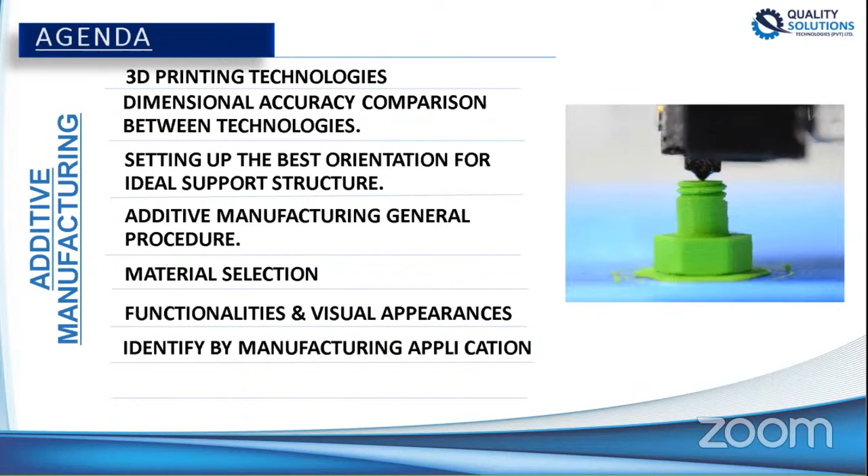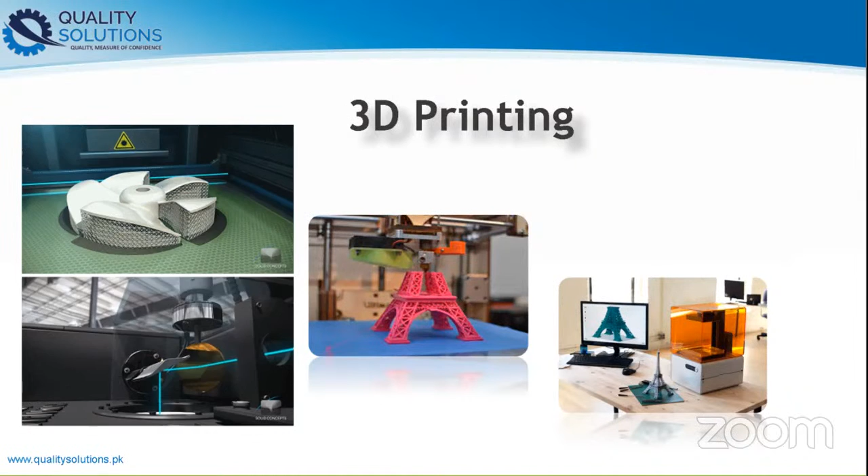3D printing is a process of creating solid objects from a digital file. The creation of a 3D printed object is achieved using an additive process, where successive layers of material are laid down in different shapes. The object can be of almost any shape or geometry and is produced from a 3D model or other electronic data information.

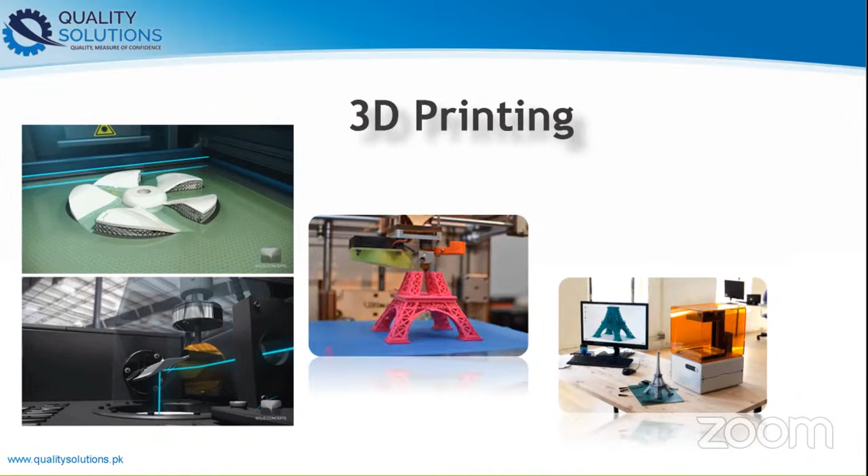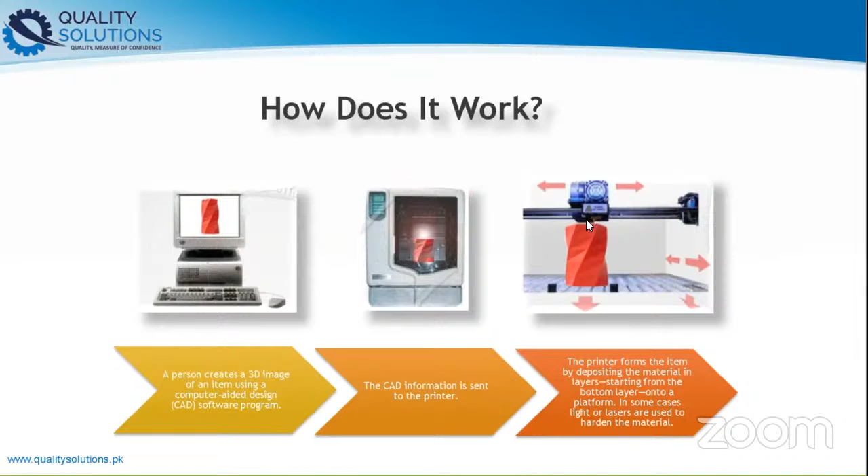When a person creates a 3D image or a CAD data model of an item in a software program like SolidWorks, they then send the CAD information to the 3D printer, where the printer forms the item by depositing material in layers starting from the bottom onto the platform. In some cases, light or lasers are used to harden the material.

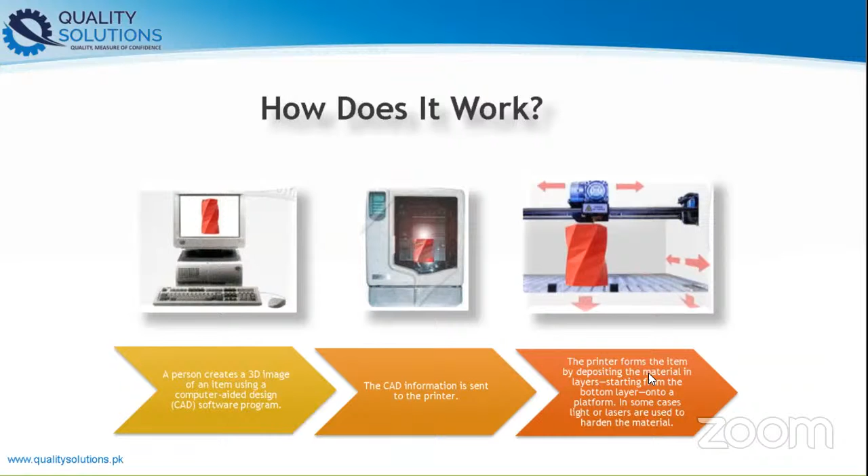Additive manufacturing takes virtual blueprints from computer aided design, that is CAD, and first slices them into digital cross sections for the machine to use as a guideline for printing. After the machine reads the design, it lays down successive layers of liquid, powder, or sheet material to build the model from a series of cross sections. These layers, which correspond to the virtual cross sections from the CAD model, are joined together or automatically fused to create the final shape. However, the strength, finishing, and accuracy of the 3D printed part depends upon some important aspects that we will discuss today. This is how we get the final model from CAD.

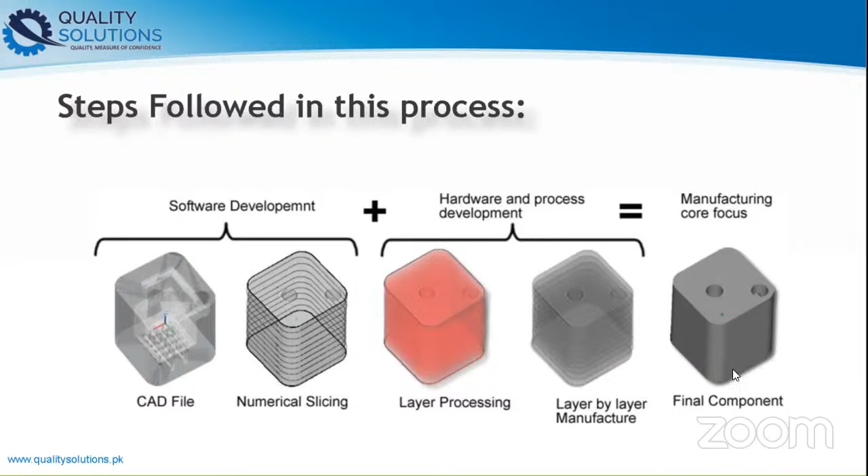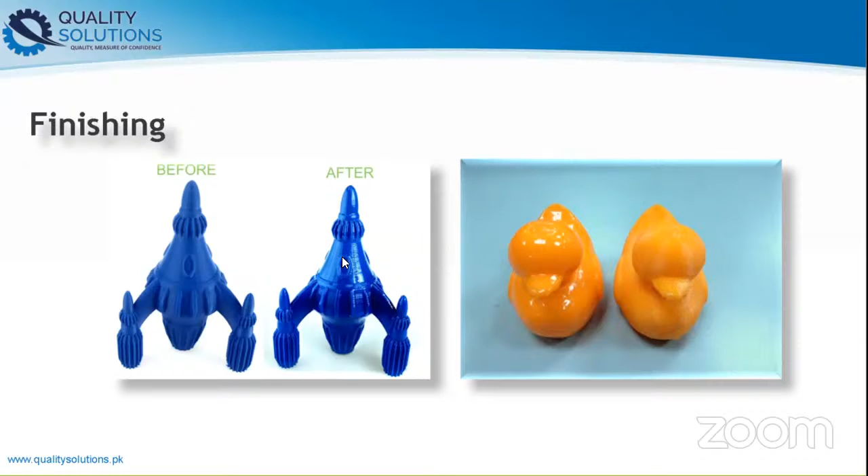Even though the printer produced resolution is sufficient for many applications, printing a slightly oversized version of the desired object in standard resolution and then removing the material with a higher resolution, that is a subtractive process, can achieve a higher resolution with good quality. So what you're seeing on your screen showing both results, the rough printing process and the surface finish after subtracting the rough material from that.

So right now, methods and technology of computer aided manufacturing are fused filament fabrication, that is FFF, also known as fused deposition modeling, we call it FDM, builds objects from the bottom by layering plastic that's heated in a moving extrusion head. SLA, also known as stereolithography apparatus, is optical fabrication or photo solidification or resin printing. This form of 3D printing technology is used for creating models, prototypes, patterns, and production parts in a layer by layer fashion using photochemical processes by which light causes curing.

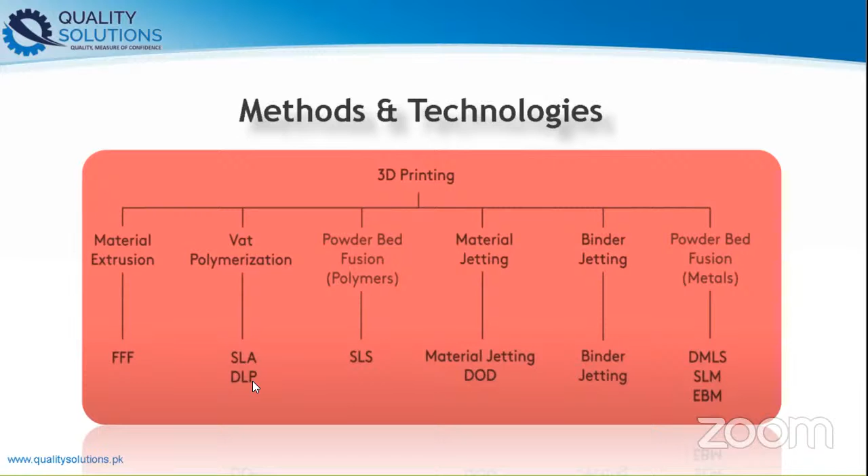In order to help quantify the accuracy of 3D printed parts, the parameter of accuracy variables like dimensional accuracy of calibrated machine, warping or shrinkage factors, and support requirements have to be tested.

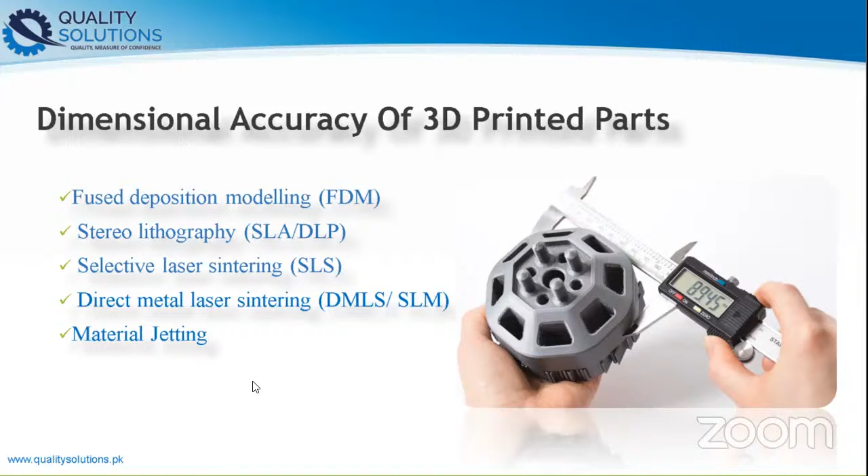Let's start with the FDM, the fused deposition modeling, which is best suited for low cost prototyping where form and fit are more important than function. FDM produces parts one layer at a time by extruding a thermoplastic onto a build plate. For large parts, this can lead to big variations in temperature across the build platform. As different areas of the part cool at different rates, internal stress causes the print to deform, leading to warping or shrinkage. Solutions like printing rafts, heated beds, and radii at sharp edges and corners can help reduce this.

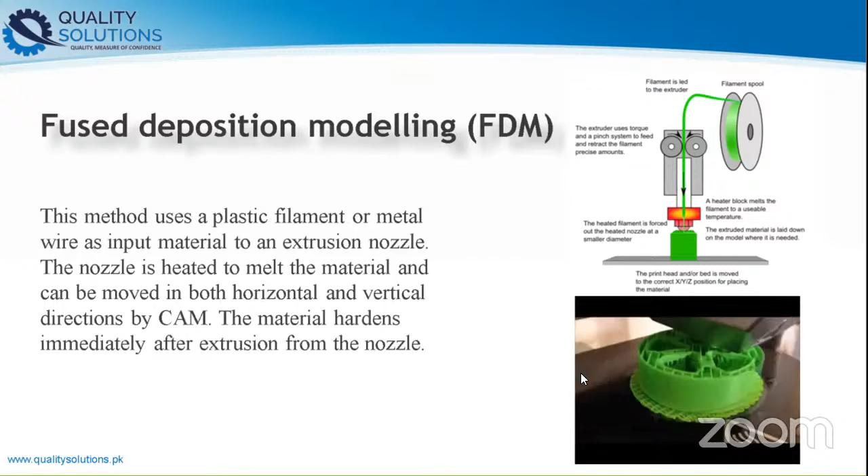Different materials are more prone to warping than others. For example, ABS is known to be more susceptible to warping than PLA. As we look at this chart, for both desktop and industrial 3D printers, thermoplastics require a higher printer temperature, which is more risky.

It's better to add a radius on the bottom edge of the part in contact with the build plate, which is recommended. However, shrinkage usually occurs in the 0.2 to 1% range depending on material.

Regarding the support required, it's essential to achieve an accurate part greater than 45 degrees, and the dimensional tolerances between 3D printers are of two types: desktop versions and industrial. The desktop tolerances are 0.5%, that is 0.5 mm, and for the industrial that is 0.15%, that is 0.2 mm for the industrial.

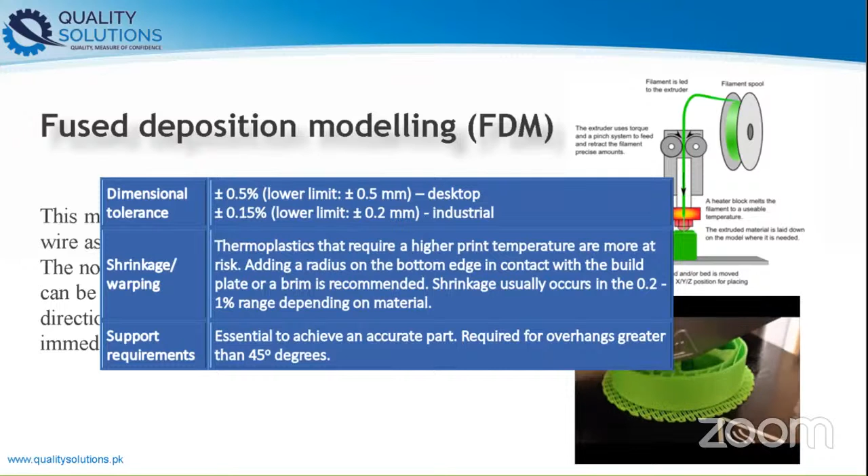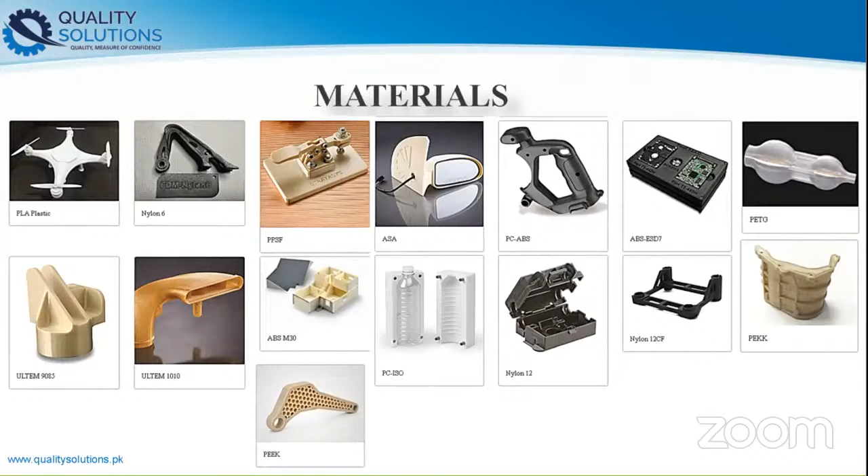So right now in FDM there are a lot of materials in which you can print. You can print in PLA plastics, nylon, PEEK, ABS, ASA, and there are categories in ABS and nylons as well, like nylon 6, nylon 12, nylon 12 CF. So there are a variety of materials available for the FDM technology.

The SLA printers use a laser to UV cure specific areas of a resin tank to form a solid part, one cross section at a time. These cured areas, however, are not at full strength until post processing with UV. Because of this, and the angle and orientations that SLA parts are typically printed at, sagging of unsupported spans can occur. As one layer is built up at a time, this effect becomes cumulative, leading to the dimensional discrepancies sometimes seen in tall SLA parts.

Dimensional discrepancies can also occur because of the peeling process used by some SLA printers. The pulling force during peeling can cause the soft print to bend, which again can accumulate as each layer is built up. Resins that have lower flexural properties, meaning they are less stiff, are at a greater risk of warping and may not be suitable for higher accuracy applications.

When we took a chart and look here again, for both desktop and industrial printers, the dimensional tolerances are 0.5 and 0.15%, but its lower limits are 0.10 mm for the desktop printers, and for the industrial application it is 0.01 mm. Shrinkage is likely for unsupported spans, where support is essential to achieve an accurate part.

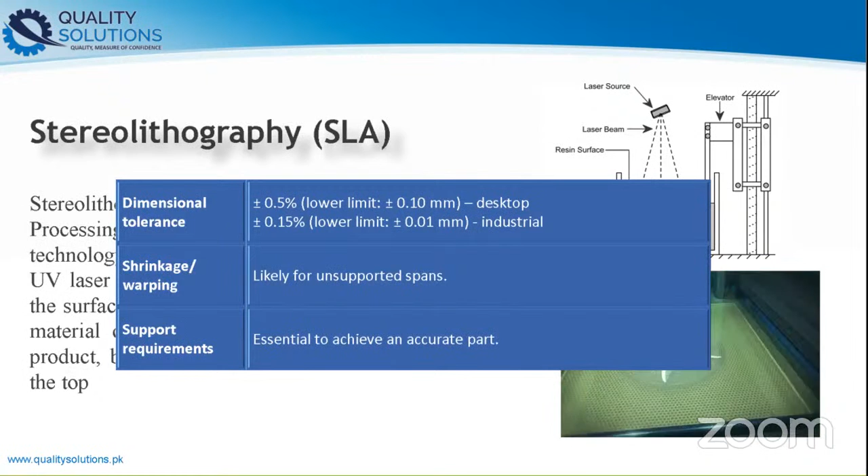Again, like FDM 3D printer technology, the SLA technology is also fully equipped with a lot of materials, and there are more than 10 to 13 resin types in which you can print.

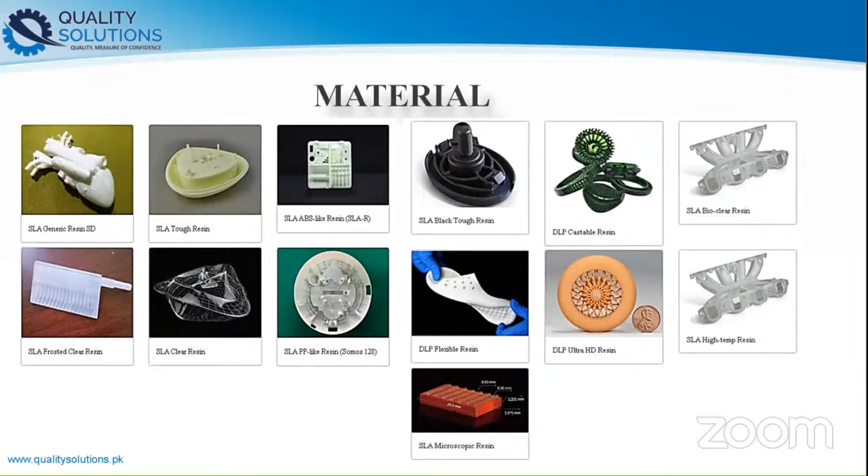Now come to the selective laser sintering process, that is SLS printing. The SLS produces parts with high accuracy and can print designs with complex geometry. A laser selectively sinters powder one layer at a time to form a solid part.

To restrict the likelihood of part warping or shrinking during printing, SLS printers use heated build chambers that heat up the powder to just below the sintering temperature. This does still, however, result in temperature gradients in large SLS parts, where the bottom of the part has cooled while the recently printed top layers remain at an elevated temperature.

To further mitigate the likelihood of warping occurring, parts are left in the powder to cool slowly, often for 50% of the total build time.

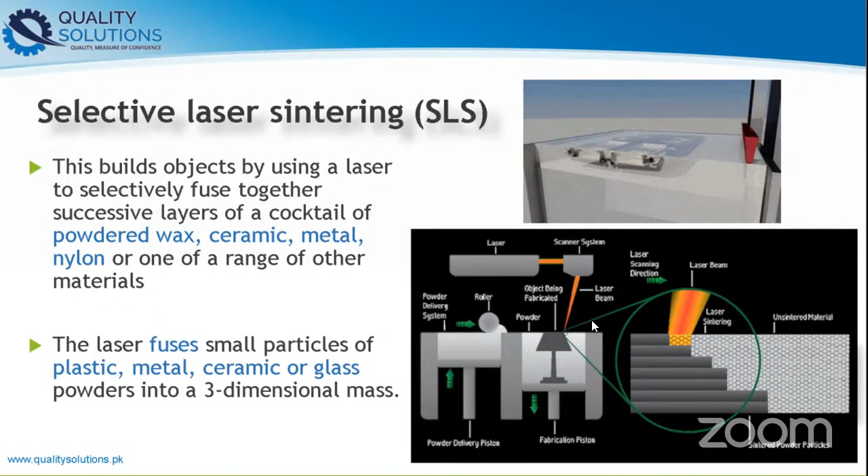The dimensional tolerance of the SLS for industrial printers generally gives you a lower limit of 0.3 mm.

Shrinkage usually occurs in the 2 to 3% range, and there will be no support required during the 3D printing, as the laser directly hardens the part and the rest of the part remains the same, so that the remaining powder creates a role as a supporting material. So there is no need for the SLS 3D printing technology to use a support material.

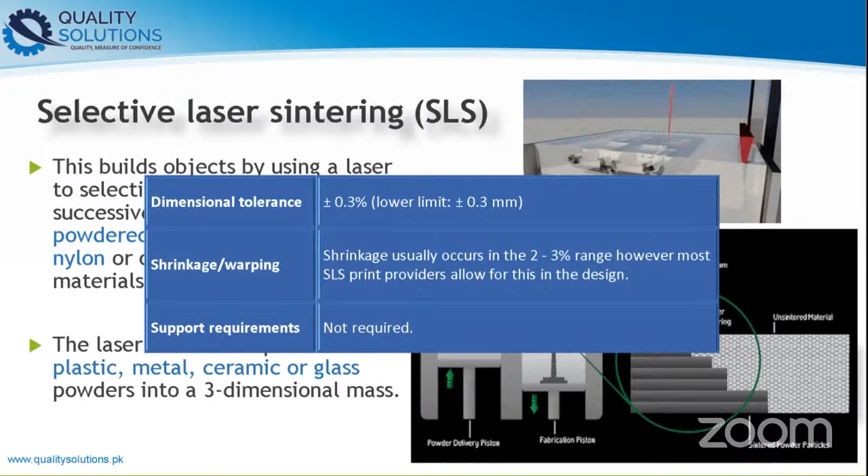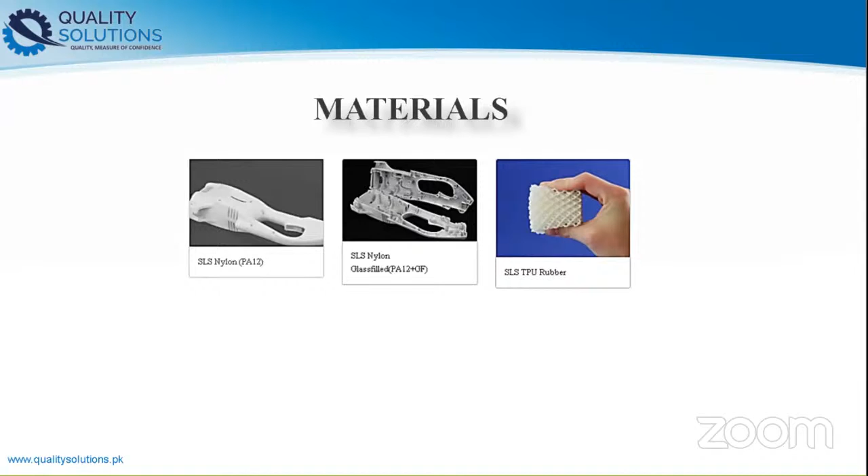Now let's come to metal printing, specifically DMLS and SLM. DMLS is the direct metal laser sintering method. It uses a laser to selectively sinter or melt powder to produce metal parts.

Much like SLS, metal printing produces parts one layer at a time in a controlled and heated environment on an industrial sized machine. This layer by layer construction, coupled with the very high temperatures involved in the process, creates extreme thermal gradients.

The net effect is that stresses are built into the part. As a result, metal printed parts are at a high risk of distorting or warping, meaning good design practices and part orientation are critical to achieve an accurate part.

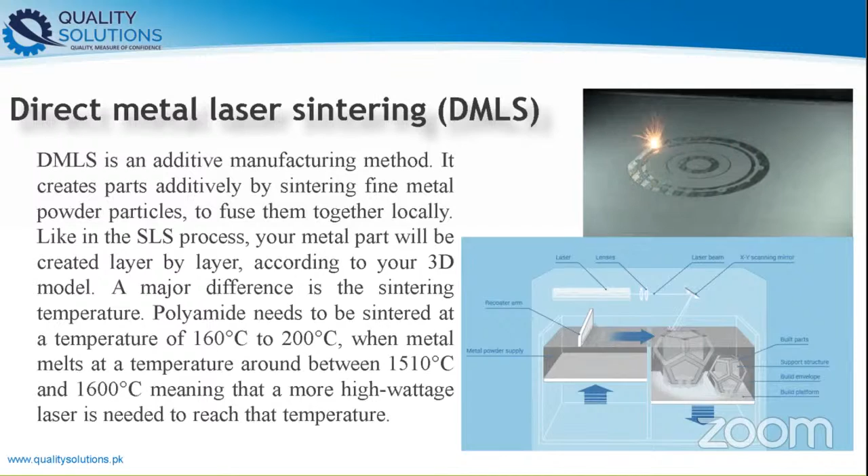The dimensional tolerance is 0.1 mm in the metal 3D printing case, with parts at a high risk of shrinkage or warping. Bracing and supports are used to help reduce the likelihood of this occurring, and support is essential to achieve an accurate part.

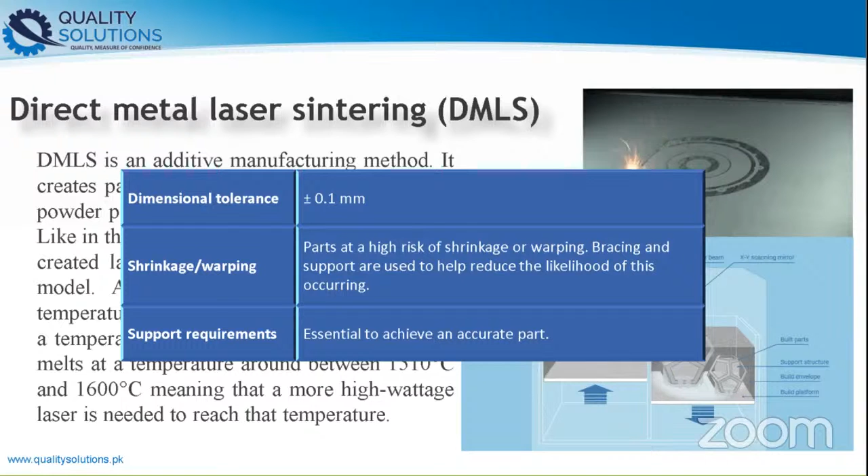Materials you can print for both SLM and DMLS 3D printing are stainless steel, titanium, bronze, cobalt chrome, aluminum, Inconel 625 and 718, and maraging steel. So all of these materials you can print with DMLS and SLM technology.

Right now we are describing the 3D printing technologies, and inshallah in our upcoming webinars we will discuss the differences between technologies like SLA and SLS, DMLS and SLM. But currently we would like to deliver you this information.

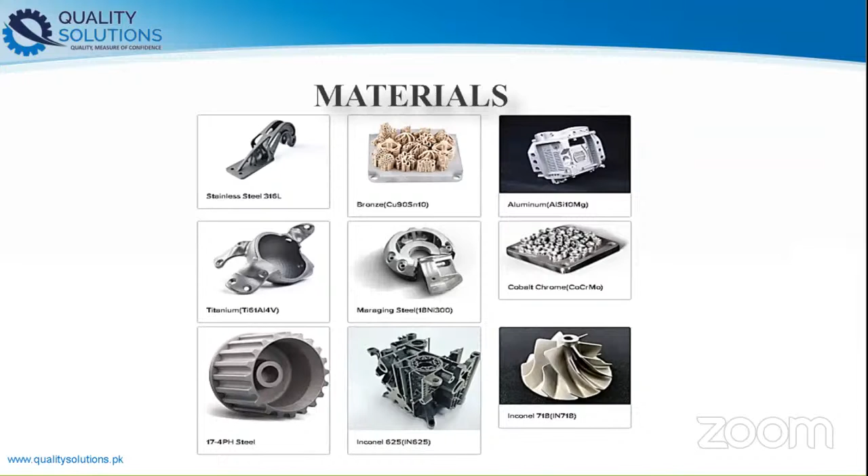Now, selection by correct 3D printing process. 3D printing is an umbrella term that encompasses multiple processes. Every 3D printing process has its benefits and limitations, and each is more suitable for certain applications than others.

We have approached the process selection from three different angles: the required material should already be known, the characteristics of the end part, like physical or visual, should be defined, and certain process capabilities like accuracy, build size, etc. are required.

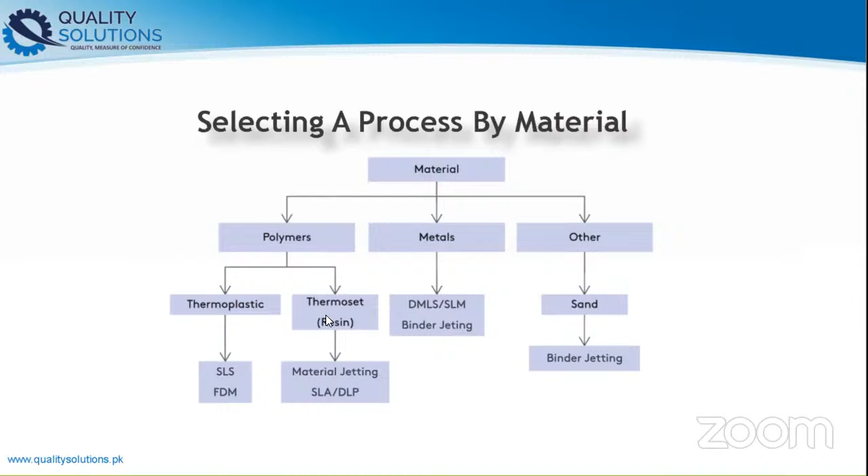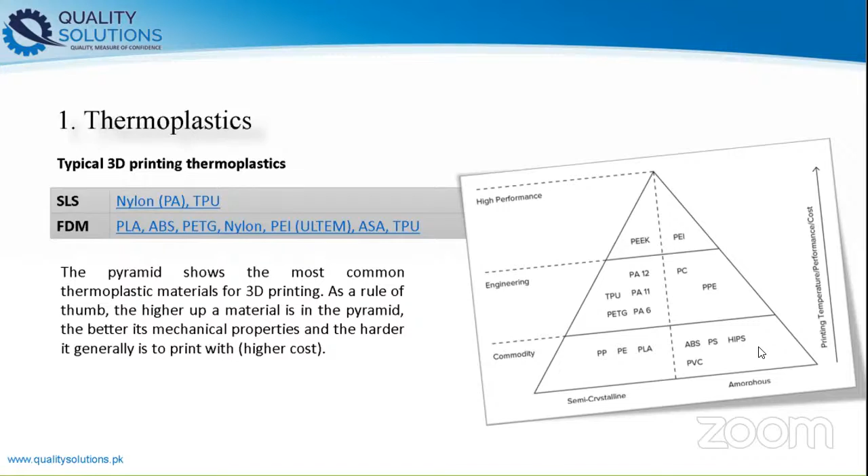The next process should be the thermosets, resins. Resins are better suited for applications where aesthetics are important, as they can produce parts with injection-molded like surfaces and fine details. Generally, they have high stiffness but are more brittle than thermoplastics, so they are not suitable for functional applications. Specialty resins are available that are designed for engineering applications mimicking the properties of ABS and PP, or for dental inserts and implants. Material jetting produces parts with superior dimensional accuracies and generally smoother surfaces, but at a higher cost than SLA or DLP, and both processes use similar photocurable acrylic based resins.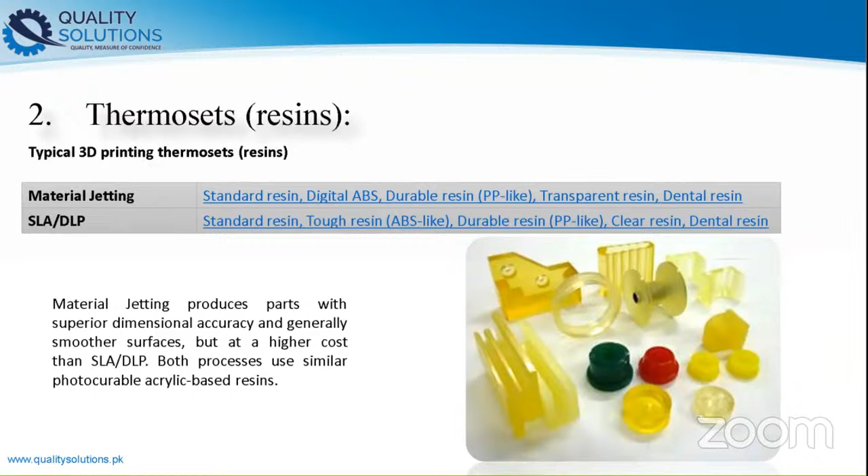Process by metals. Metal 3D printed parts have excellent mechanical properties. How? It can operate at high temperature. The freeform capabilities of 3D printing make them ideal for lightweight applications in the aerospace and medical industries. DMLS or SLM parts have superior mechanical properties and tolerances as well, but binder jetting can be up to 10 times cheaper and can produce much larger parts.

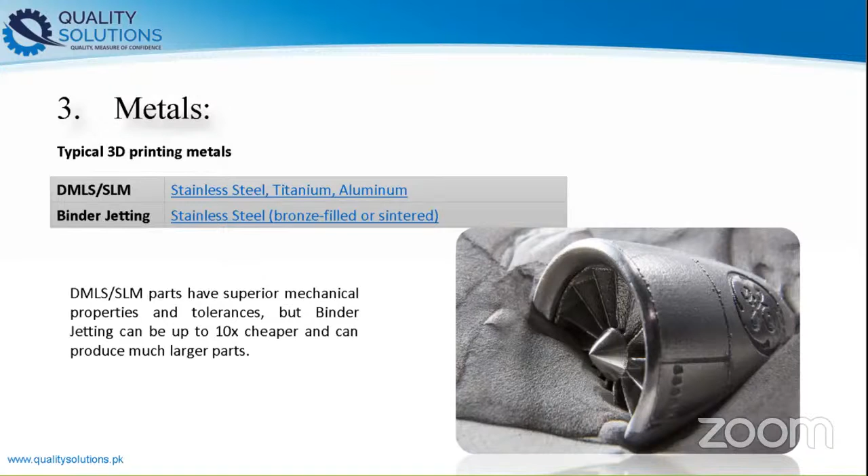Other materials can be 3D printed, but they are not as widely used since their applications are limited. These materials include ceramics and sandstone in full color with binder jetting. Here is the tip: due to the additive nature of the technology, 3D printed parts will often have anisotropic mechanical properties, meaning that they will be weaker in the Z direction. I will show you in my next slides. For functional parts, this characteristic should be taken into account during design.

So the process for binder jetting printing starts with the powder deposited into a tank first, and then inkjet applies the binder where each layer is printed, and the powder is recoated after each layer, repeating until the part is complete. After that, once the part is completed, we put it into the clean tank, also called the subtractive tank, to remove the extra material on the part and achieve a good finishing surface.

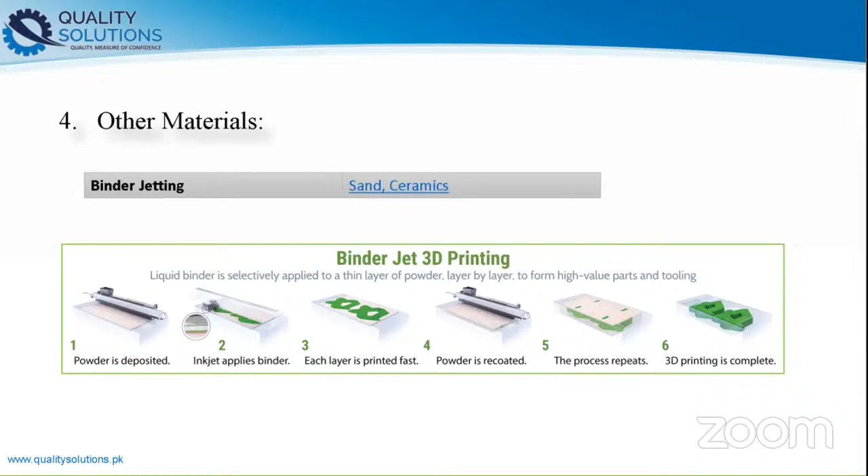We can also select the 3D printing technology by process or use case. It is important to determine early in the selection process whether the main design consideration is function or visual. This will help greatly in choosing the most suitable process. As a rule of thumb, thermoplastic polymer parts are better suited for functional applications, while thermosets are best suited for visual appearances.

So by use case, we will first discuss functionality. When designing a part or prototype that will interface with other components in the assembly, it is important to define the necessary level of tolerance. Otherwise, when there are no tolerances defined between the parts, the parts could not be seated exactly during assembly. As a rule of thumb, selecting a process with higher dimensional accuracy will increase the cost as well. Another option is to finish features with critical dimensions or small details after 3D printing, for example, by drilling holes or tapping threads.

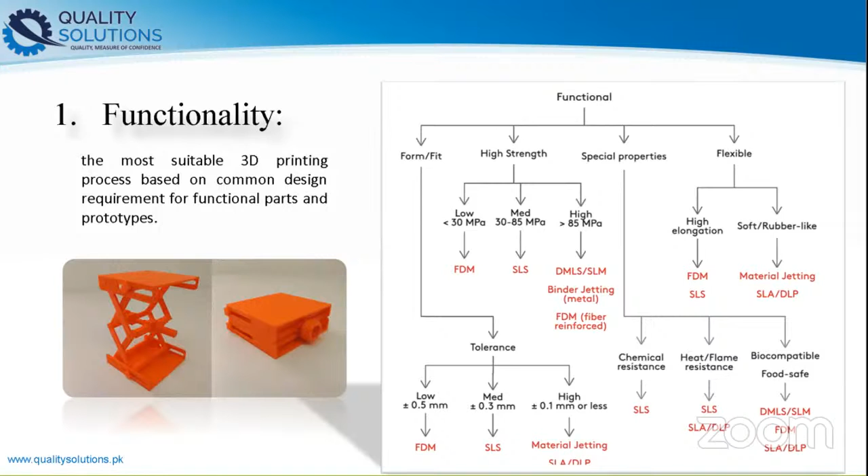The use case is very important, depending on the visual appearance as well. Both SLA, DLP, and material jetting can produce parts with a smooth, injection molding-like surface.

The main difference between the two processes, apart from cost, is that support material in material jetting is soluble, while in SLA and DLP it needs to be removed manually after printing, leaving small marks on the surface that need to be post-processed, like sanded or polished later.

With very small parts having thin layers or thin walls, it becomes complex to remove the extra surfaces that have been printed, meaning the support material. When you try to take them out, your surfaces may be disturbed.

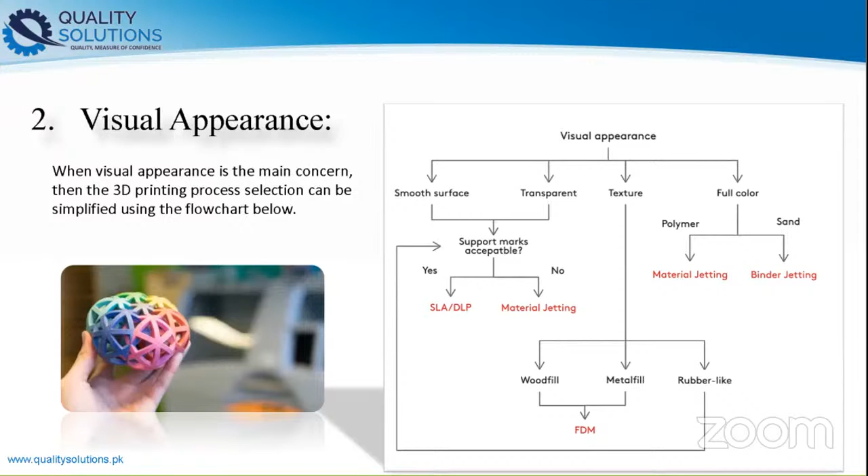Now we can also select a process by the manufacturing capabilities of the 3D printing technology. When the model design is already finished, the capabilities of each 3D printing technology will often play the main role in process selection. It is important to have an overview of the fundamental mechanics of each process to fully understand their key benefits and limitations.

Here are some handy rules to help you interpret the data: dimensional accuracy, build size, and support material information. Dimensional accuracy is connected to the level of detail each process can achieve, and the build quality of each printer. Processes that offer higher accuracy can usually create parts with finer features.

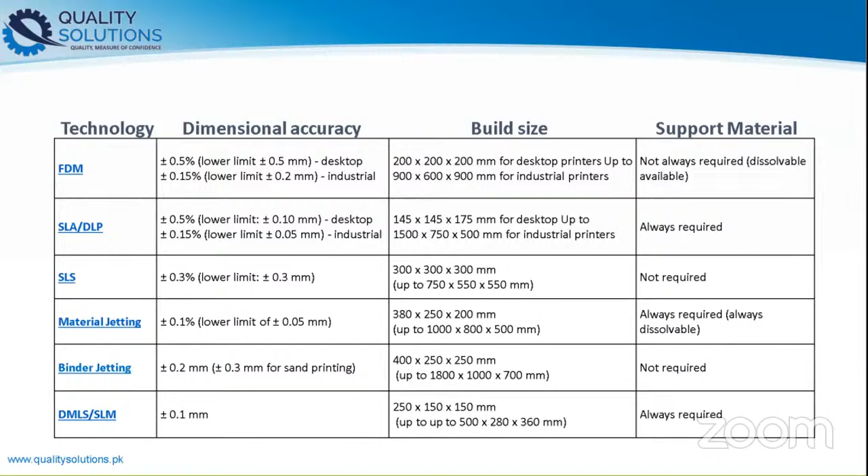Another important aspect to consider when choosing a technology is the impact of layer height. Due to the additive nature of 3D printing, layer height determines the smoothness of the 3D printed surface and the minimum feature size a printer can produce in the Z direction. Using a small layer height also makes the stair-stepping effect less prominent and helps produce more accurate curved surfaces.

Typical layer thickness with FDM can go from 50 to 400 microns, and the most common operations for FDM 3D printers commonly use 200 microns, because we have to consider the time of the part. If we give more accuracy with less layer height, the print time will be more.

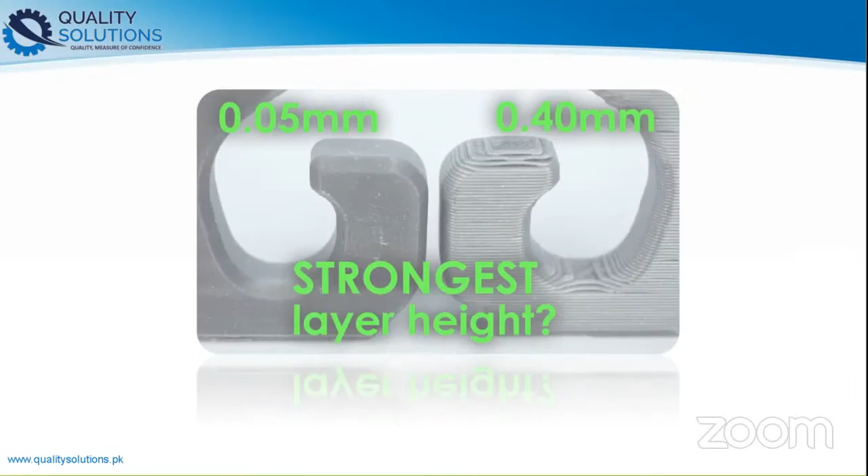Before we answer that, let me tell you that here we will discuss an analytical report posted on the World 3D Printing platform, but the study is specific to FDM technology only. Which layer height has more strength: is it 0.05 millimeters with the good surface finish, or 0.4 millimeters?

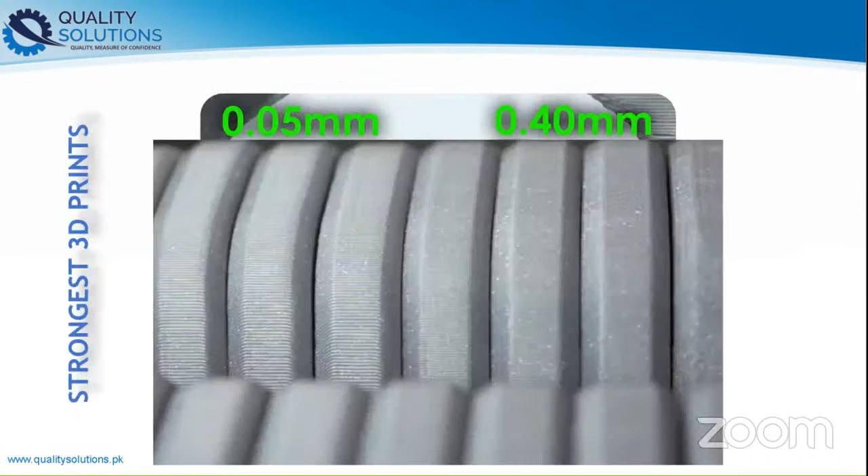Have you ever asked yourself what influence the layer height you set in your slicer has on the strength of your 3D prints? A study printed samples with layers ranging from 0.05 millimeters to 0.4 millimeters and measured their strength on a universal test machine to check which one is the strongest.

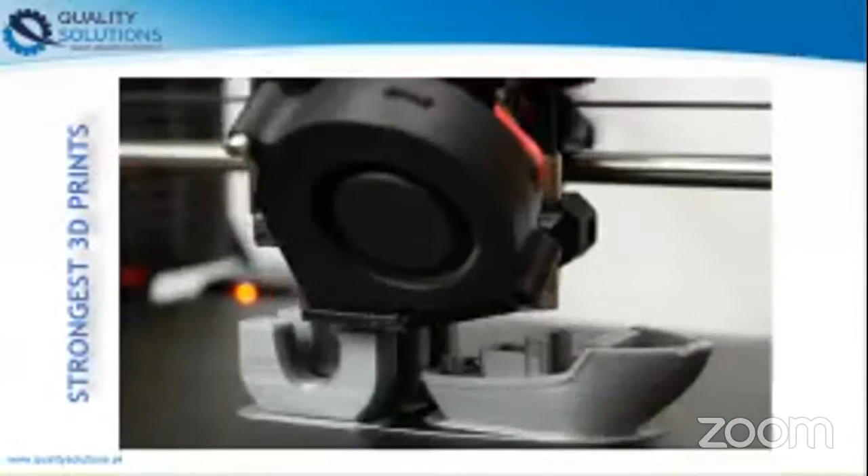Most people set the layer height to adjust the amount of detail of their 3D prints and how smooth the surface finish shall be in the end. Thinner layers give you less of a stair-step effect but will increase the print time. Actually, the printing time is inversely proportional to the layer height.

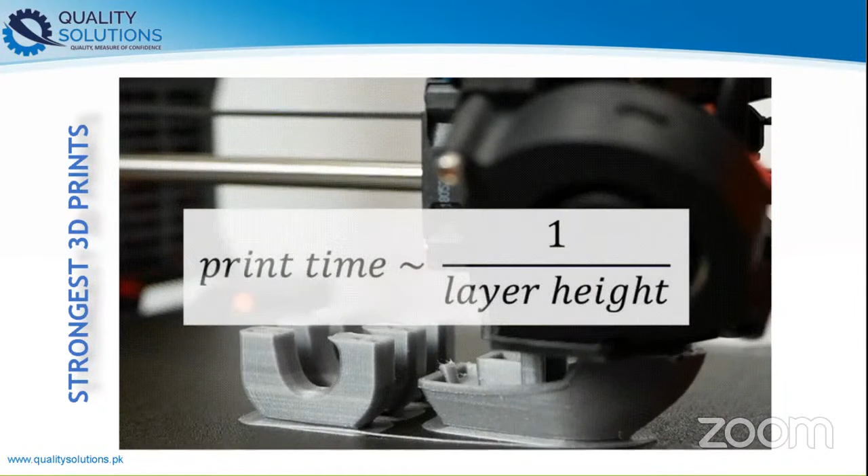Most people set the layer heights to adjust the amount of detail of their 3D prints and how smooth the surface finish shall be in the end. Thinner layers give you less of a stair-step effect, as you can see on the screen, but will increase the print time. So the printing time is inversely proportional to the layer height, using half the thickness will be more or less double the print time.

If we are talking about strength, at this point I actually mean layer adhesion - how the individual layers of material bond together. Thinner layers could be stronger because the material is squeezed out more from the nozzle, and due to the low distance between those and the previous layers, the melted material helps with bonding.

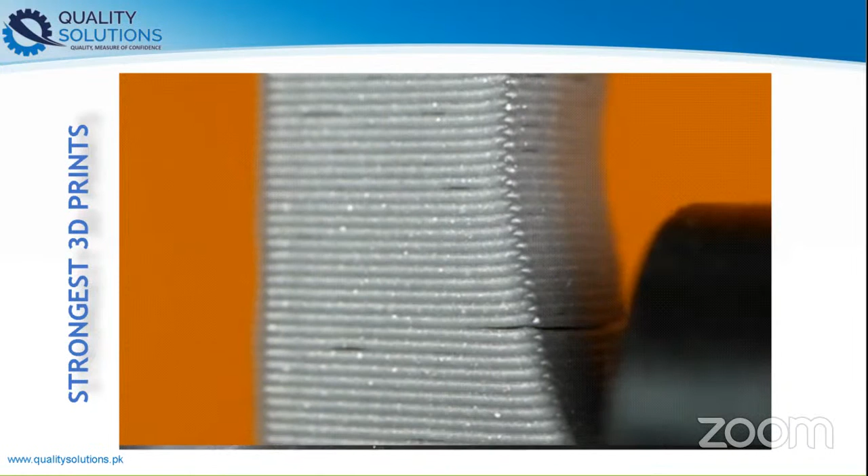Since you extrude less plastic in a given amount of time, the material stays in the melt for longer and therefore properly and evenly warms up and melts. The density of the part within the layer could be higher due to smaller gaps between the lines of already printed material.

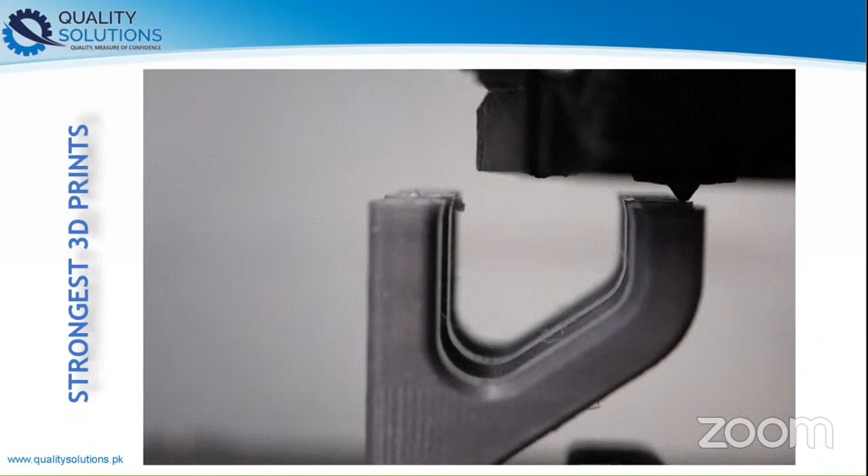Especially the point that the material stays melted for a longer period of time and therefore potentially degenerates is an argument that thicker layers might give you spots with higher strength.

With thicker layers, the position tolerance of the Z axis doesn't play such a big role, because the tolerance is a smaller percentage of the total layer thickness. What I mean is that, for example, a 5 micrometer thickness tolerance on a 50 micrometer layer is way worse and could result in plus or minus 10% over or under extrusion, whereas the same 5 micrometer tolerance on a 250 micrometer layer thickness gives you only plus or minus 2%.

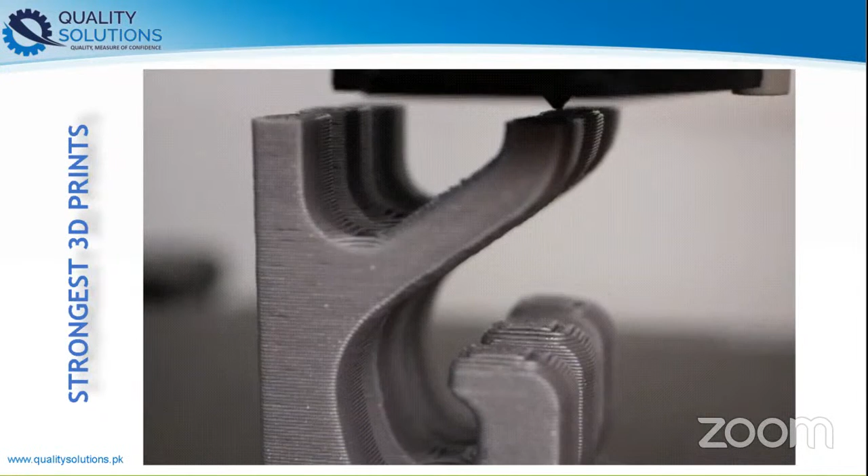Then there's the statistical aspect. With thicker layers, you consequently print fewer layers for the same part. This decreases the risk that in one layer something went wrong, which in the end will be the location where a failure starts. This concept is actually called a statistical size effect.

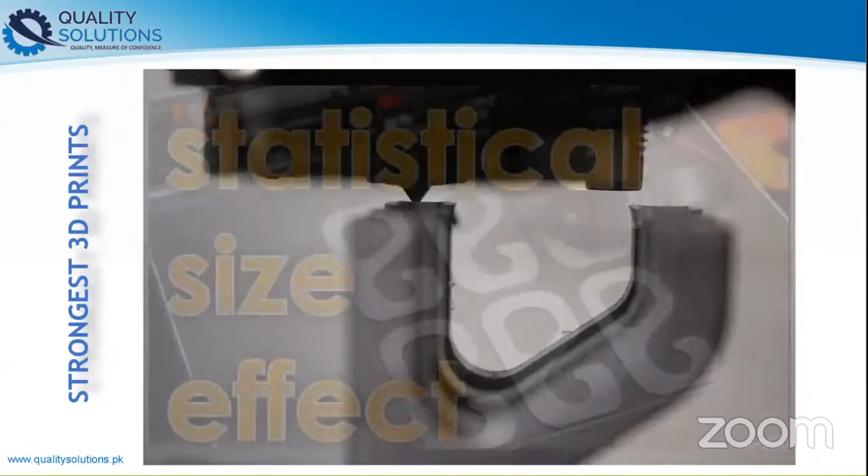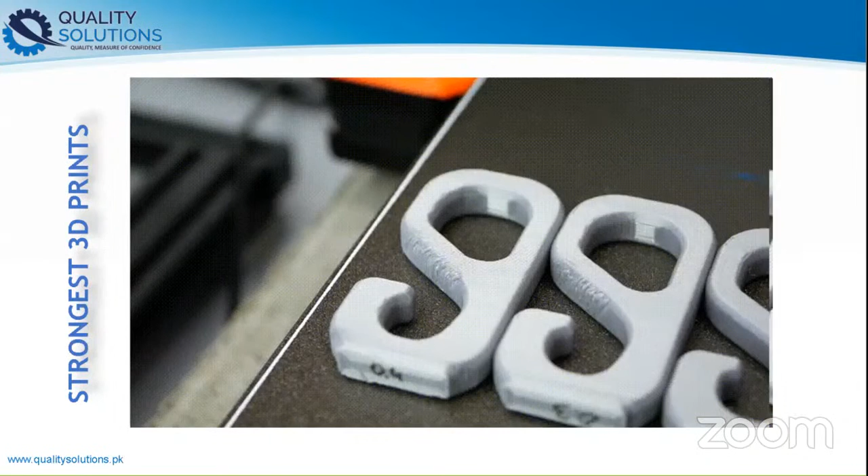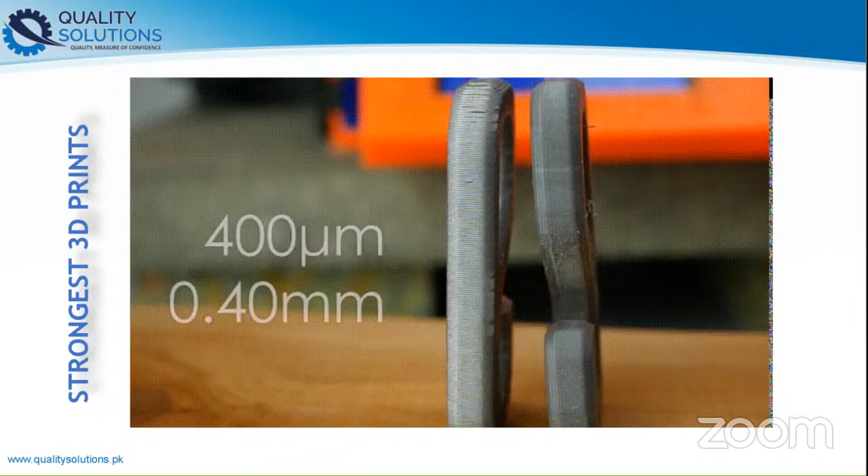In our research, all parts were printed in PLA using a hardened steel nozzle with default settings. In the test we chose the standard 0.15 millimeter settings and set three parameters, then only varied the layer thickness, increasing top, bottom, and wall count to get a consistent wall thickness. We ended up testing six different layer heights: 0.05 mm, 0.1 mm, 0.15 mm, 0.2 mm, 0.3 mm, and 0.4 mm. We never printed with a layer thickness beyond 0.4 millimeters, since that's beyond what you should print with a nozzle of this diameter.

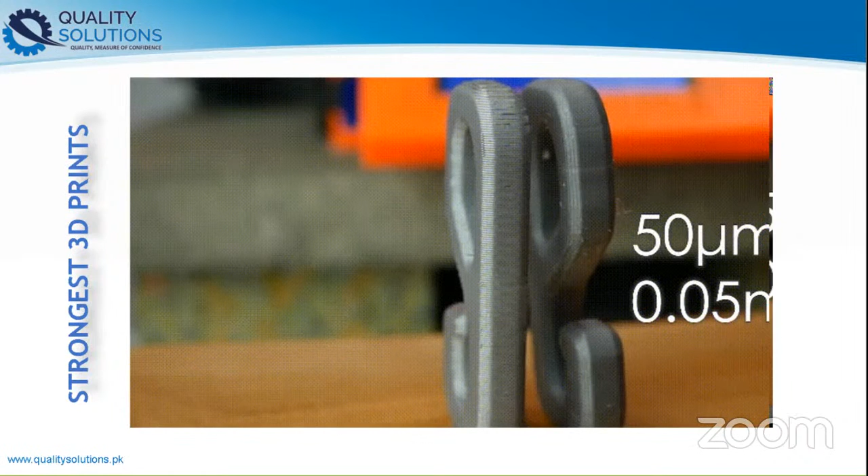As mentioned in the beginning, printing time is inversely proportional to layer thickness, but the first interesting result was that not all the hooks weighed the same. As you can see on screen, the higher the layer thickness, the less the part weight, which is probably explainable by the fact that thicker layer features have more gaps and are therefore less dense. We'll keep these values in mind when we look at strength later.

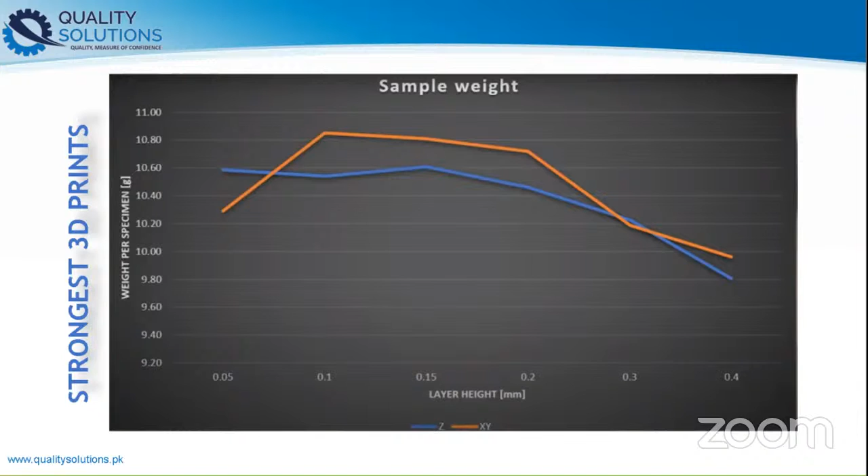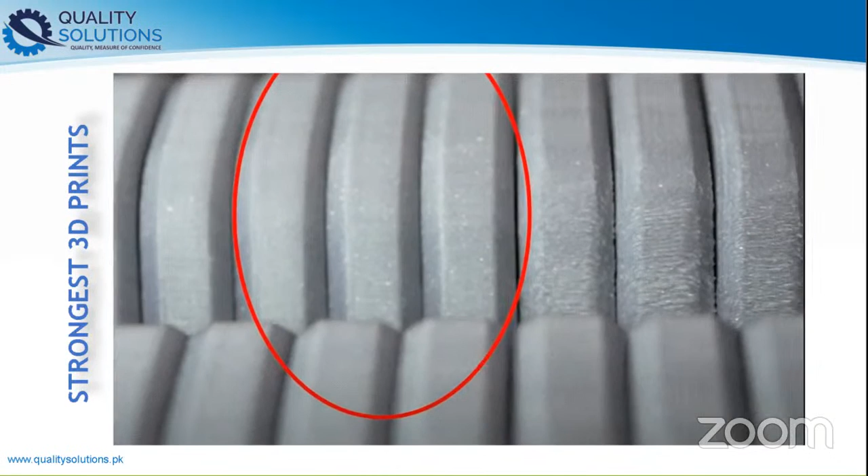Another interesting result for us was print quality, which in my opinion didn't really improve as the layers got thinner. However, the side surfaces usually looked better since there was less stair-stepping. All in all, the sweet spot in our opinion was 0.15 mm. We also noticed that the color of the parts started to get irregular, especially at thinner layers. This is probably because the material is in a molten state for the longest amount of time, messing with the pigment and maybe even the base polymer.

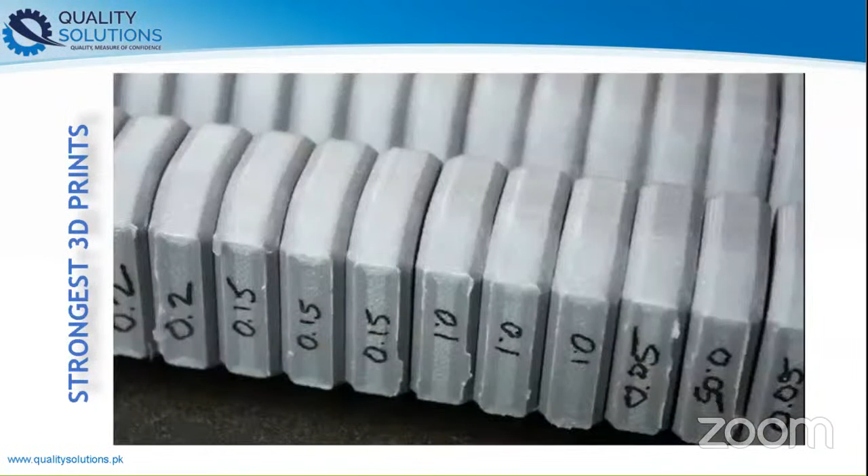Please continue. So now we put all the samples that we tested, one by one, into a DIY universal test machine and loaded them, very importantly, all at the same speed until they failed, meanwhile recording the load values.

At first we put the part in the XY flat orientation and printed across the whole mentioned range. Let's look at the results from 0.05 millimeters up to 0.4 millimeters.

With the test, we got results showing that with 0.05 millimeters, our hook breaks, in the XY flat orientation, at 79 kilograms of load. At 0.1 millimeter layer thickness it breaks at 85 kilograms, and at 0.15 millimeters it breaks at around 80 kilograms. After 0.1 mm you can see the load values go downhill. At 0.2 mm the load to break the hook reduces to 78, and at 0.3 mm it reduces to 66 kilograms.

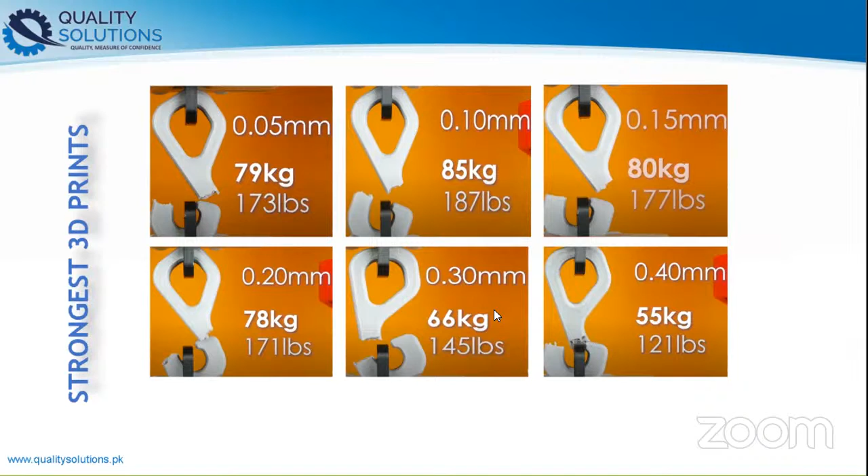So what is ideal right now? From 0.05 millimeters up to 0.2 millimeters, all fail in the range of about 80 kilograms. The 0.3 millimeter sample failed quite a bit earlier, not to speak of the 0.4 millimeter hook.

If we take a look at the weight-normalized values, the picture stays pretty similar, only the thicker layers became a little better due to their reduced weight. The fracture surfaces are also very interesting, because for thicker layers the gaps between the filament lines are clearly visible, and the finer you go, the more it looks like an injection molded part. So the first result is that you shouldn't go much above 0.2 mm.

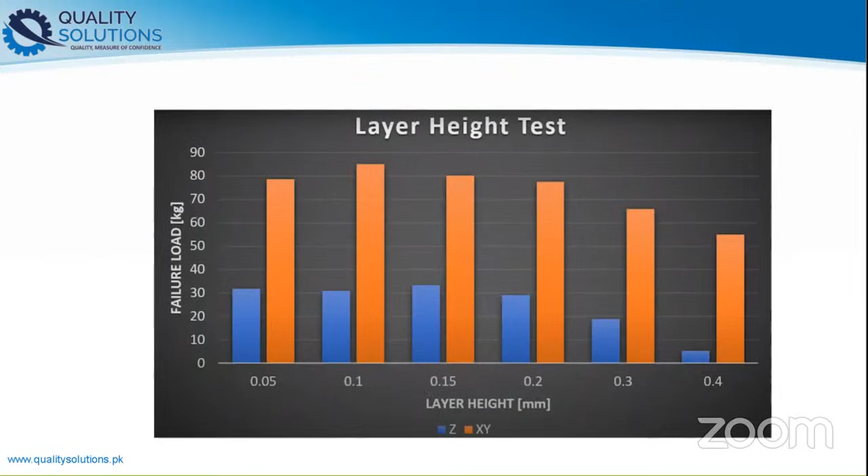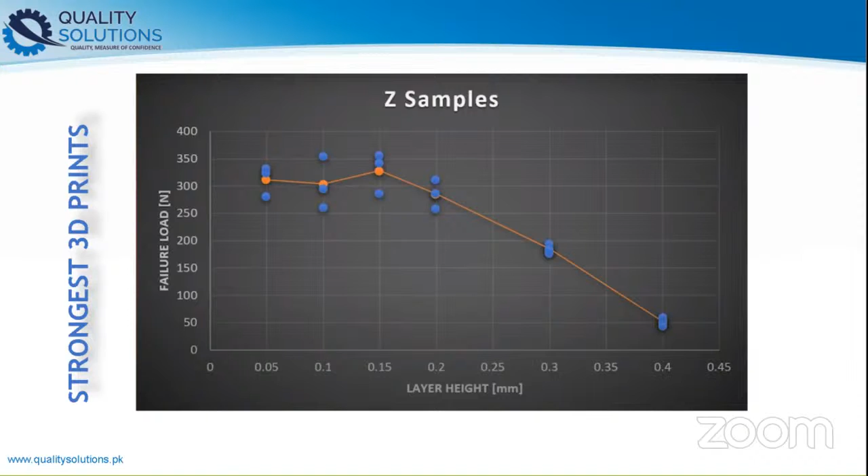Therefore, the ratio calculation between the nozzle diameter and layer thickness enables us to generalize the results. Applying this to our test results means that starting at layer thickness more than half of the nozzle diameter, we can expect that the strength of the parts will suffer, which means that for strong 3D prints and a 0.4mm nozzle, which normally comes with 3D printers, you probably shouldn't go above 0.2mm layers.

Interestingly, I would have thought that really thin layers would perform better. Hence, the layers don't stick better to each other when they are thinner.

Beside the layer height, there are many other parameters that will play an important role in the strength of your 3D prints, which includes printing speeds, extrusion of material itself, part cooling, and especially layer adhesion.

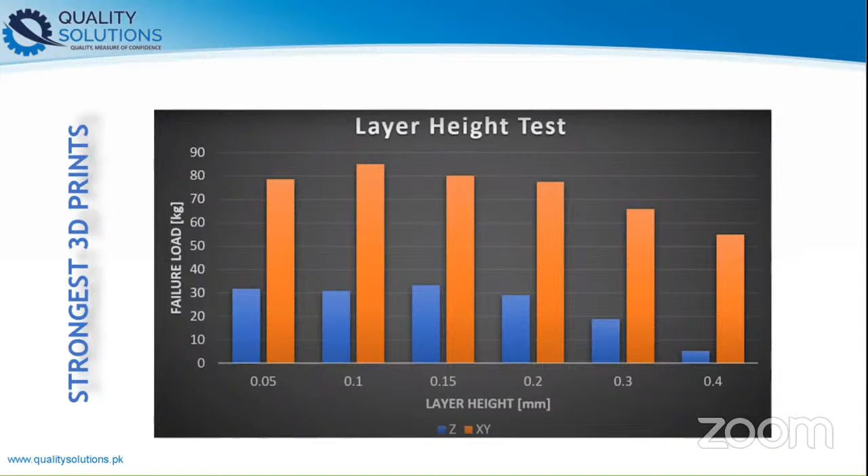Therefore, as per the above analysis, we have figured out some recommendations and determined that you should analyze early in the selection process if part functionality or visual appearance is your first priority. Also, when more than one process can produce parts in the same material, the selection process becomes a cost versus properties comparison.

For functional polymer parts, prefer thermoplastics like SLS or FDM over thermosets, and for visual appearance and aesthetics, thermosets like SLA, DLP, or material jetting are the best options. For metal parts, keep in mind to choose DMLS or SLM for higher performance applications and binder jetting for lower cost and larger part sizes.